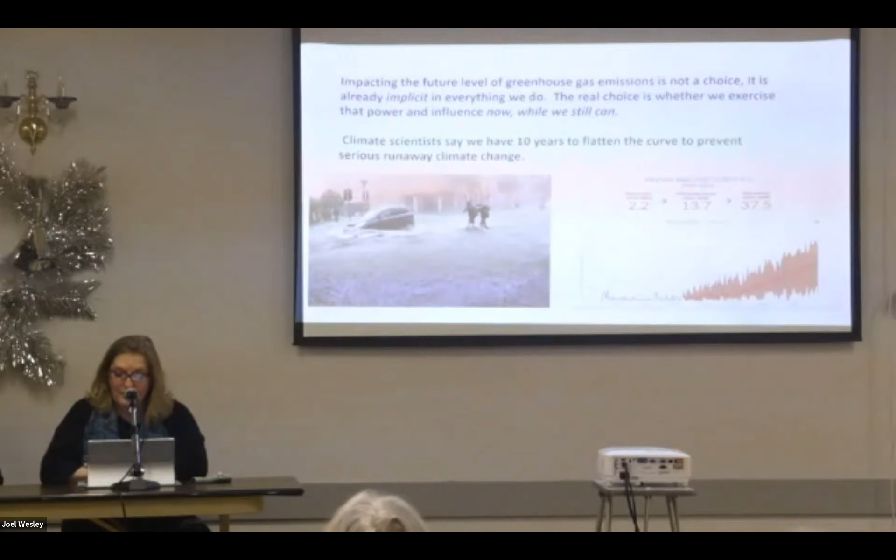We're currently at a global increase of 1.1 degrees Celsius. Looking around at the devastation in BC and on the East Coast, can you imagine what a 3 or 4 degree rise will bring? Here is an example of how extreme things will get.

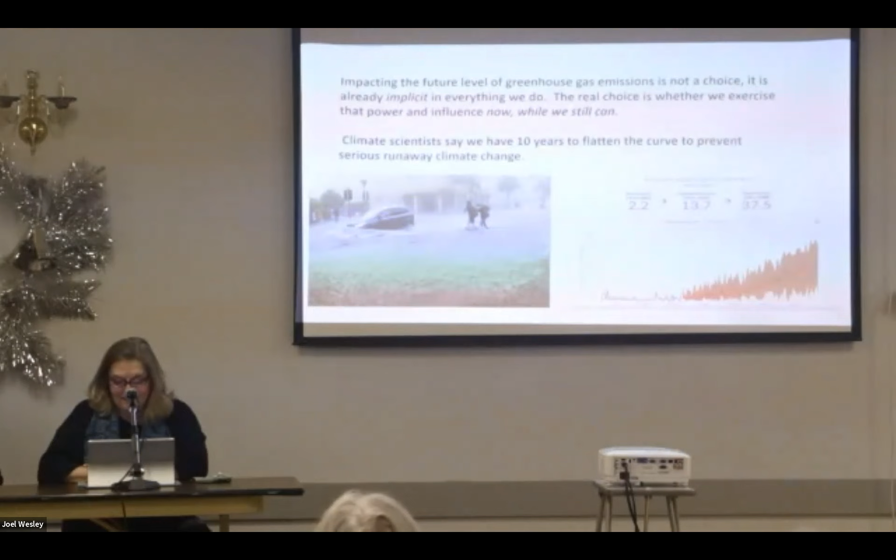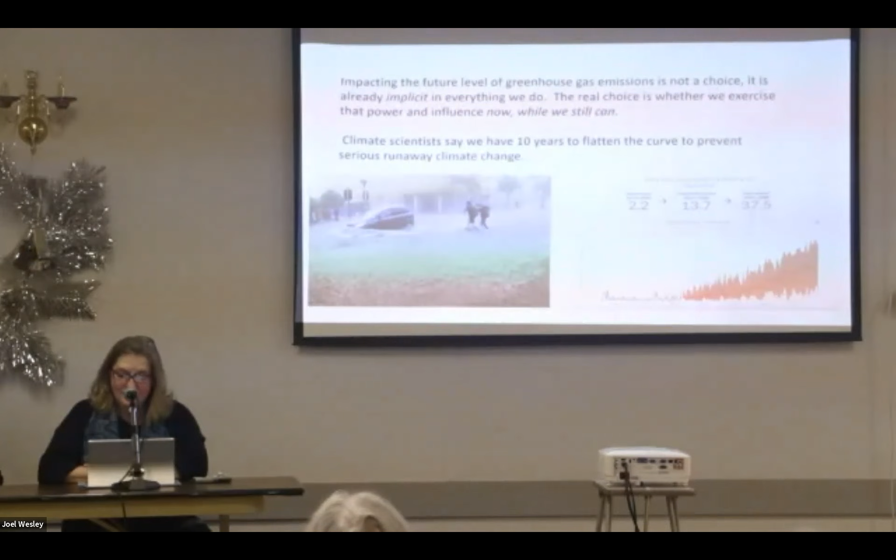The Canadian Climate Atlas shows what summers in Northumberland will look like. In the 20th century, we had 2 to 3 days when the temperature rose above 30 degrees Celsius in the summer. Now we have 13, and by mid-century, it'll climb to 37 days. By the end of the century, 70 days will be above 30 degrees Celsius, which is 86 degrees Fahrenheit. This will be coupled with warm nights, creating heat waves.

This is just one of the problems we'll be facing going forward, and we are the last generation that can do anything about it.

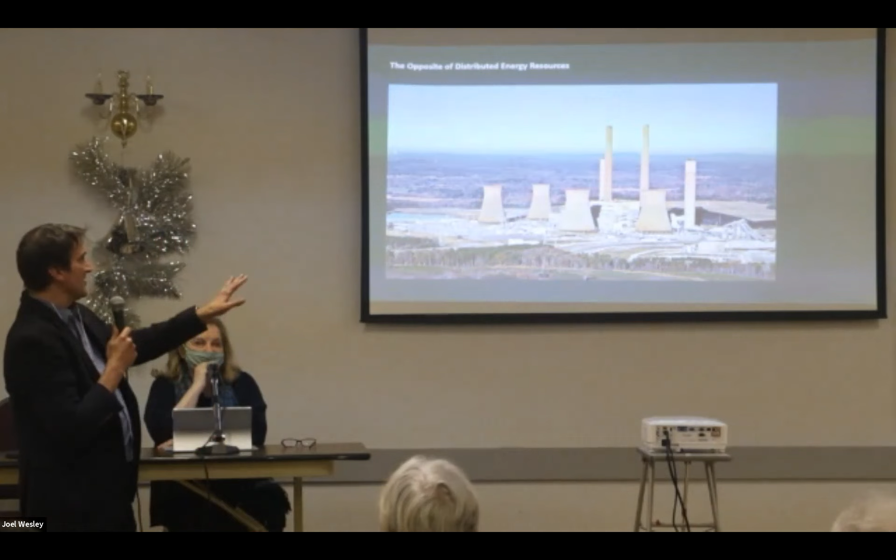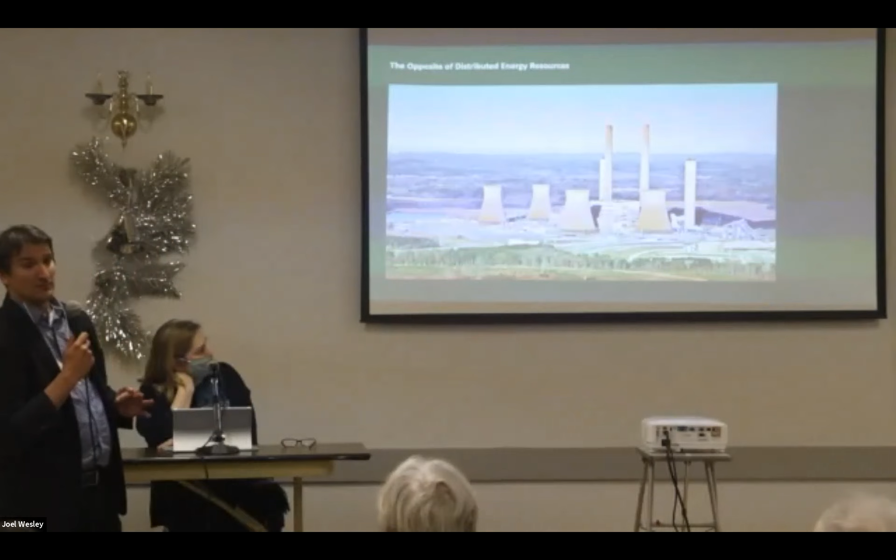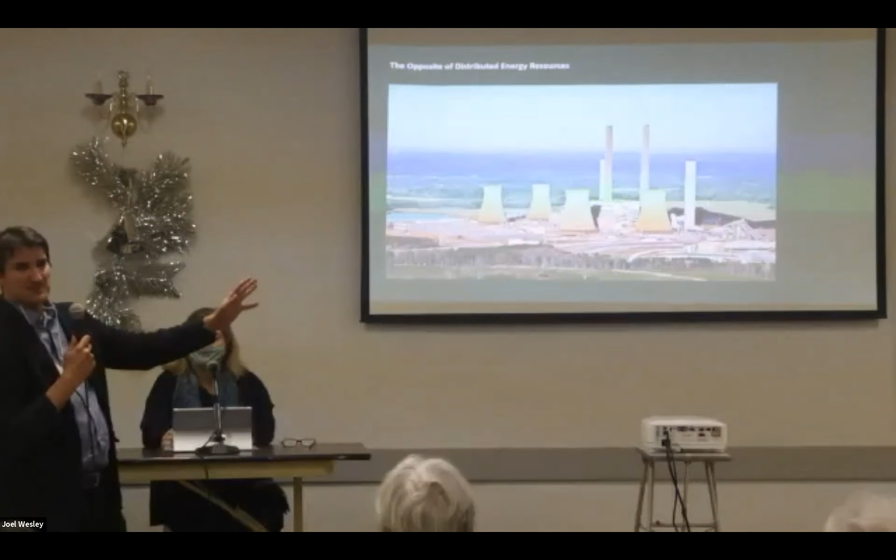I wanted to talk a little bit more macro about distributed energy resources. That's something you may have heard of and maybe don't fully understand. This is the opposite of distributed energy resources, this is a giant coal plant. We're very lucky, as Steve said, in Ontario to have mostly very clean renewable energy as our main source for electricity between nuclear and hydro. But many parts of the world and many parts of the US still rely heavily on gas and coal to deliver electricity. This is centralized energy, and that's what everybody's probably been used to most of their lives.

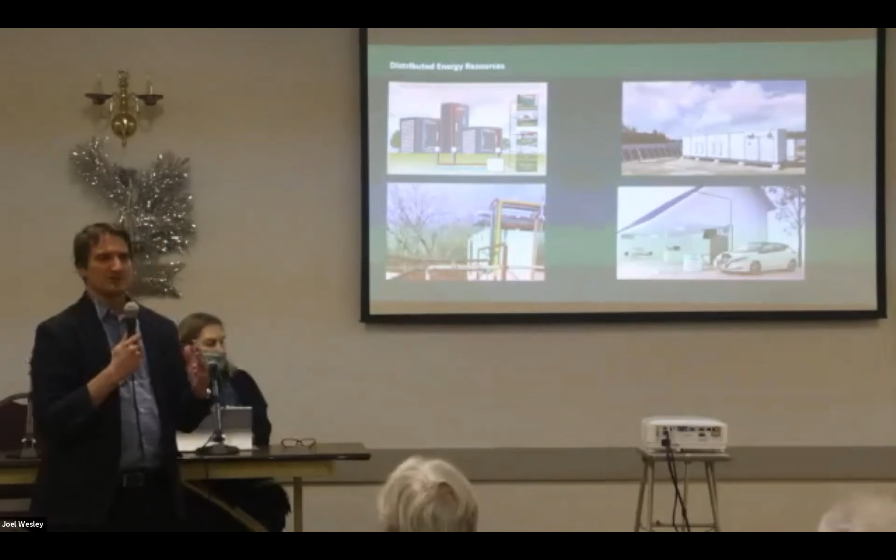Distributed energy resources are following really the exact opposite. It means it does not require centralized economies of scale. If you're going to build a nuclear power plant, generally speaking, you need billions of dollars. The power has to be distributed over hundreds and thousands, if not millions, of residents, and they're very difficult long-term capital projects. Distributed energy are things that can be done on a much smaller scale and don't have nearly the same sort of economies of scale requirements. So solar works, yes, it's better to have 3 megawatts of solar than 3 kilowatts, but there isn't a huge difference in the cost per unit of a 3 kilowatt plant versus a 3 megawatt plant. There isn't major economies of scale in solar.

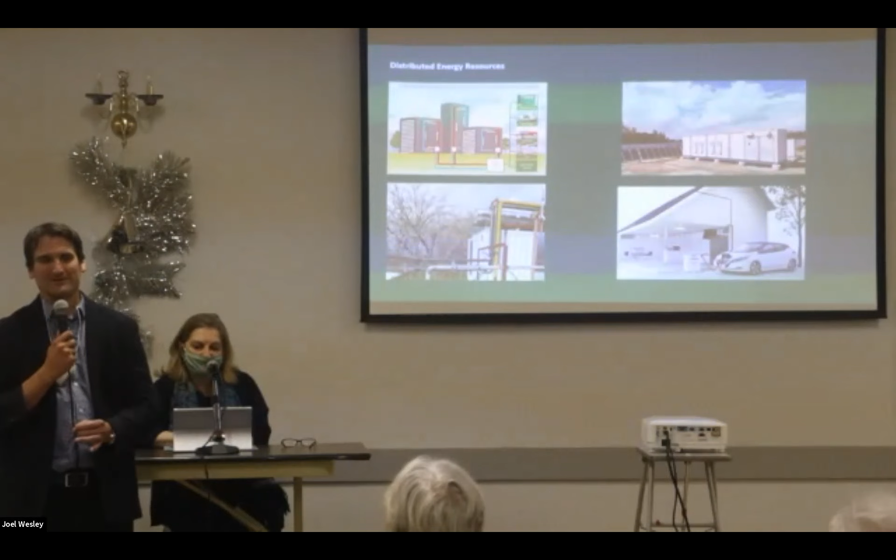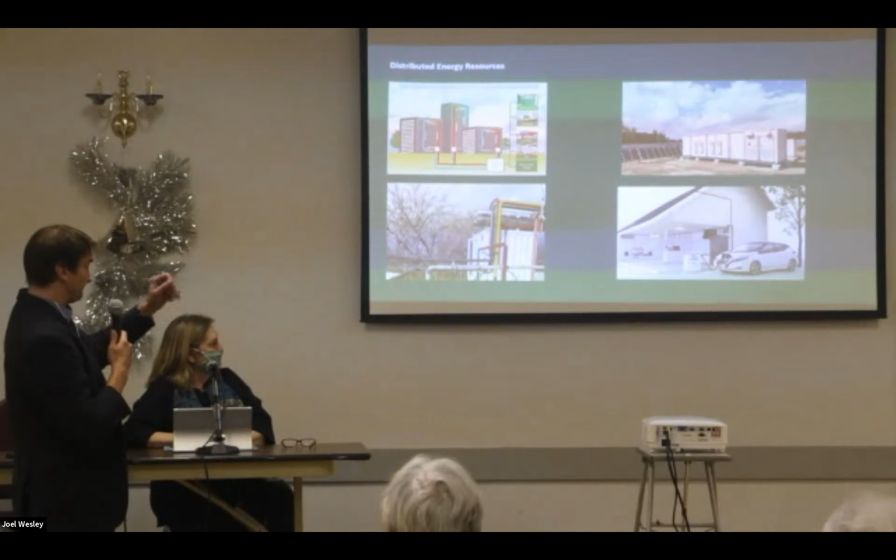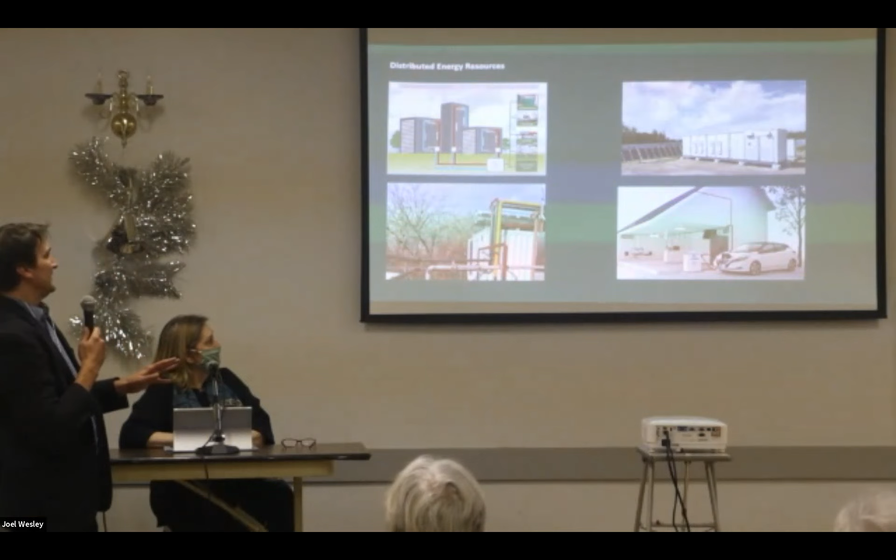Many of these things can be deployed on a much smaller scale, and they can be deployed by private businesses or by municipalities. An example is geothermal. We're part of a large geothermal district energy plant in the Whitby area that's going to supply a whole new development there.

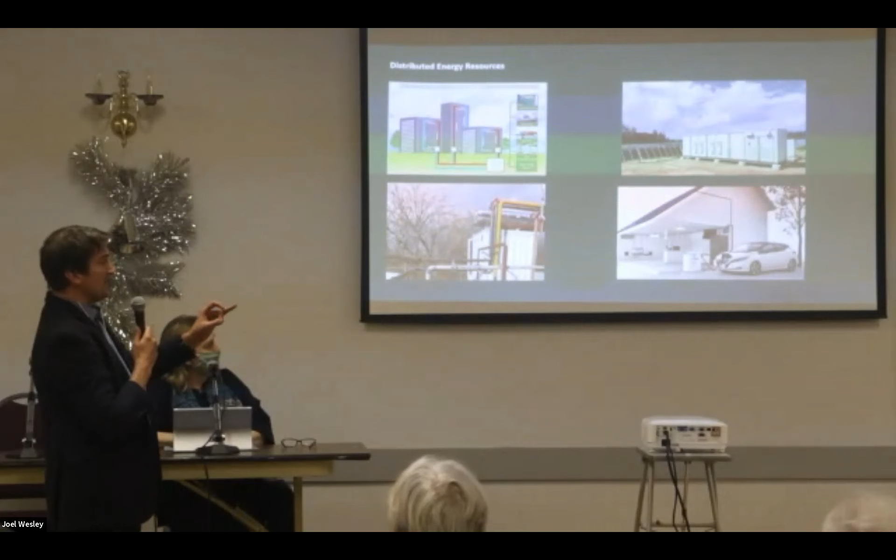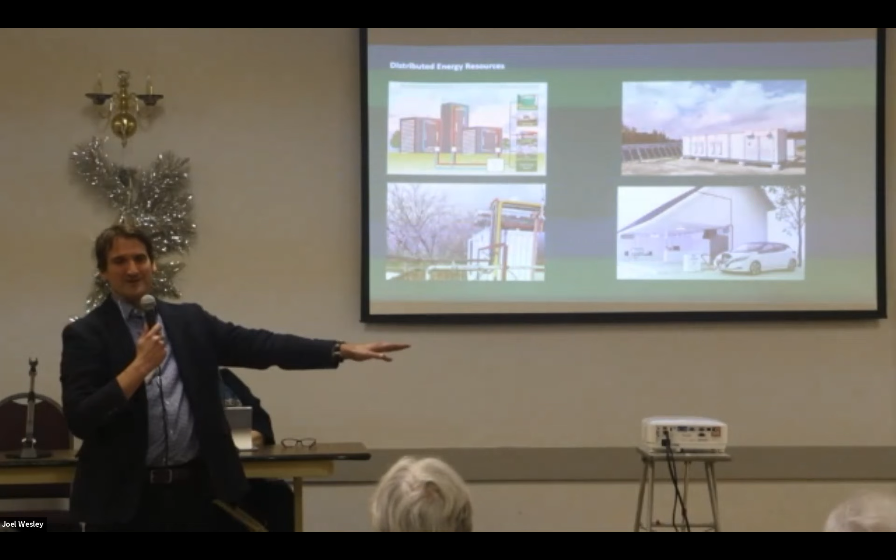We've done many and continue to do solar plus storage projects. That is starting to compete directly with the grid. So in that case, it may not be offsetting use of natural gas, but it can be reducing the cost of electricity, which can provide savings that can be used to offset natural gas in other areas. So it's not always just about offsetting natural gas, it could be reducing the cost of electricity so that you can afford to offset natural gas.

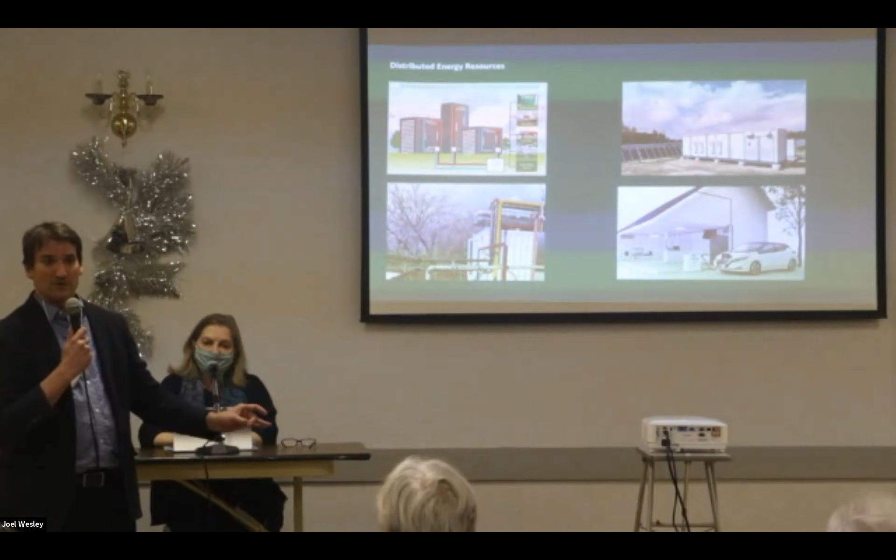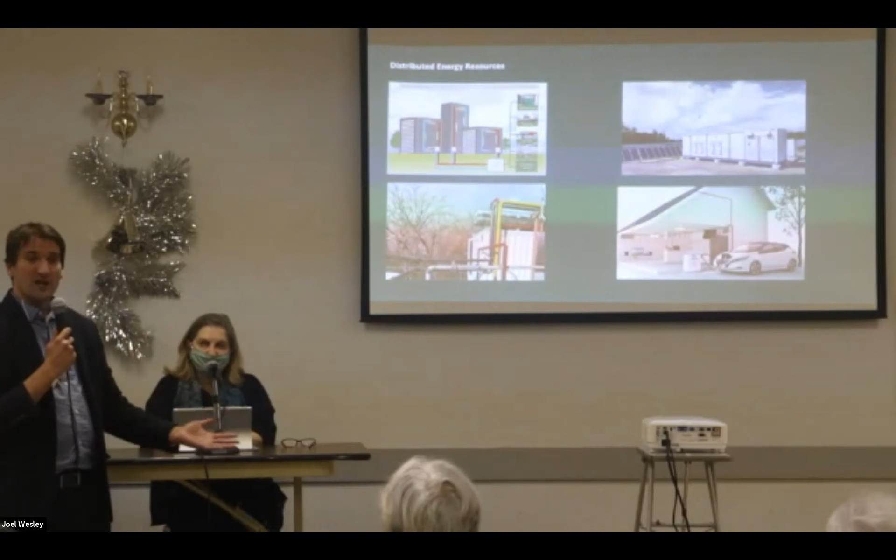Electrification, generally speaking, for those who don't know, natural gas is generally cheaper than electricity on a per kilowatt hour basis. So you have to find solutions that keep the client whole. We work on the front lines of climate change in the real world, so our solutions have to work for clients, and they're all concerned about sustainability, but they're also concerned about cost. So it's finding that balance.

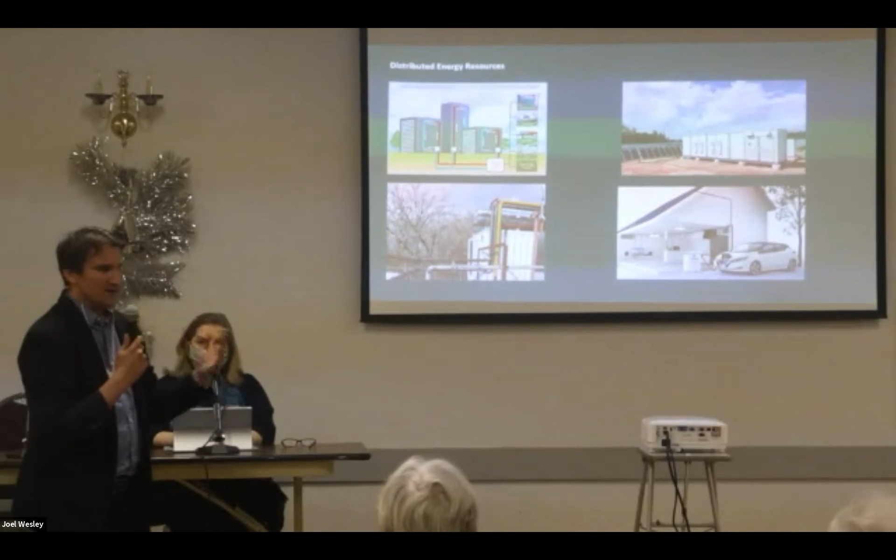This in the bottom left is a biogas cogeneration plant that's using methane from sewage in the Belleville wastewater treatment plant, converting it to natural gas. We use that to create electricity and heat, which all goes right back into the plant processes. So that's a closed loop, and it works extremely well. It's using all of that rather than flaring off or burning off the methane - we're using that energy in a renewable way. That's going to be a big thing at wastewater treatment plants.

And then, as Steve was alluding to, electric vehicles are also a distributed energy resource. They are batteries on wheels, large batteries on wheels. Eventually, the grid will be able to draw from those. You'll be able to draw from those from your house as a backup power source, and they'll create this mesh network of battery power. So we're not there yet, but that's the evolution of what's happening with electric vehicles.

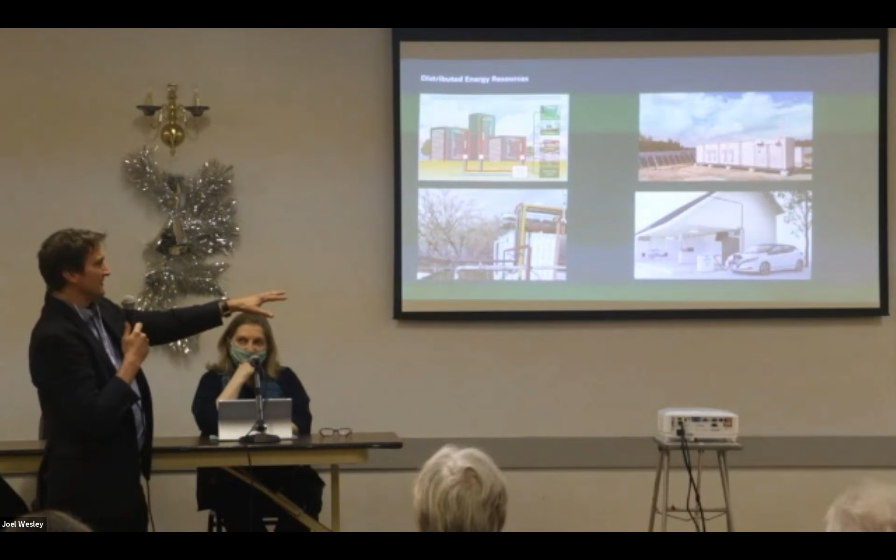Again, this is something people aren't realizing, how far the technology and cost has come. That is competing against Hydro One head to head, and that was three years ago. There are probably very few farms in Ontario that can't be converted to mostly solar and compete with electric, and reduce the cost. This is something people don't see happening behind the scenes, but we're moving from where FIT and microFIT and these subsidized programs dominated solar, to where we went flat for a long time because those programs weren't available. Now we're going to see a whole second wave based on pure economics, and it's really exciting.